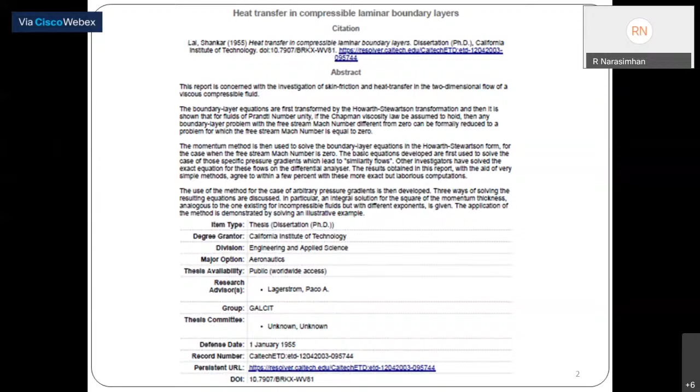All right, so with that little reminiscence about connections with Caltech, let me turn to the topic of my presentation, which is going to be on mechanics and mechanisms of fracture of magnesium alloys, a topic in which I've been working for the last 10 years or so. Let me begin by first acknowledging my collaborators: my former PhD student, Subramanya Prasad Narla, and my current PhD student, Vaishak,

my colleague in materials engineering, Professor Satyam Suwas, with whom I've been collaborating quite extensively on this topic, my former master's student, Kaushik, who later went and did his PhD at Brown University, and now is employed at GE Global Research in New York, and Dr. Raj Mishra from General Motors R&D Warren Labs, Michigan, who actually introduced me to this topic of magnesium deformation and fracture.

Now, magnesium alloys have been attracting a lot of attention in recent years for a variety of reasons. The most important being that they have low density and high specific strength, and they also have good damping characteristics and machinability. In view of this, they are being considered as economic replacements for aluminum die castings, cast iron, and steel components in automobiles. If you take a look at the photograph on the right side, that is an inner door frame made from magnesium alloy.

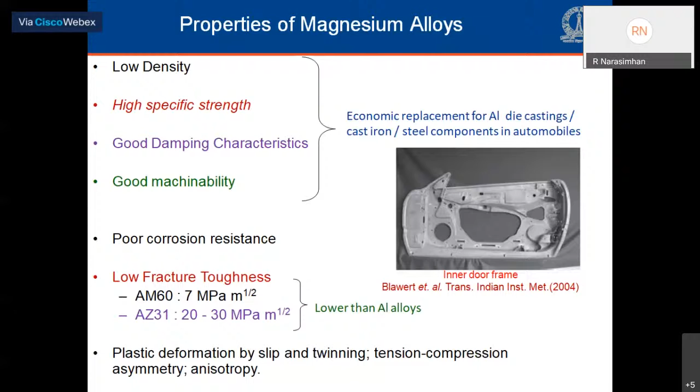The top panel, comprising basal slip, prismatic slip, and pyramidal slip A, cannot accommodate deformation along the C-axis of the hexagonal lattice. It requires activation of one of the systems from the bottom panel, which involves pyramidal A plus C slip, tensile twinning or 10-1 bar 2 type, and contraction twin or 10-1 bar 1 type.

The tensile twins are called tensile twins because they cause extension along the C-axis, whereas the contraction twins cause contraction along the C-axis. The tensile twins can widen very rapidly. They can engulf entire grains, as we are going to see in some of the slides subsequently.

Contraction twins, on the other hand, remain typically narrow. Both of these involve very large rotation of the crystallographic lattice when they take place.

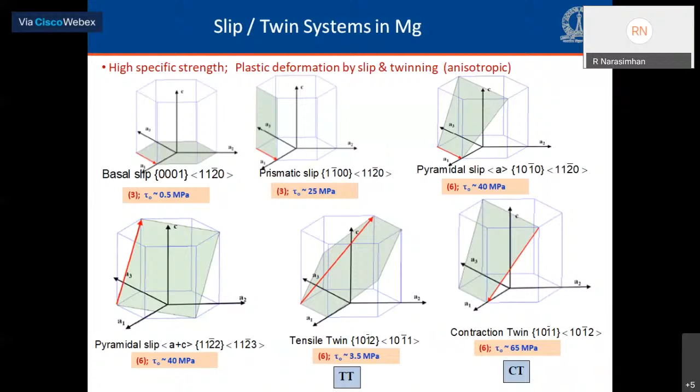If you examine the critical resolved shear stress values listed here, you'll note that basal slip and tensile twins have very low critical resolved shear stress. They are soft deformation modes, whereas pyramidal C plus A and contraction twins are hard deformation modes. Let me show one very important result from the literature which would motivate our work.

This is a study on the effect of stress triaxiality on ductility and the failure mechanism in a rolled AZ31 magnesium alloy, from the work of Kondori and Benzerga. They did tension tests on smooth and notched cylindrical bars cut from a hot rolled AZ31 magnesium alloy. What you see in this slide is the fracture surface corresponding to a sharply notched Rn2 specimen, which has a certain triaxiality.

The triaxiality T is defined as the ratio of the mean stress to the equivalent stress, sigma m by sigma e. The Rn2 specimen has a triaxiality of around 1.5.

If you examine the fracture surface, you can see there are grooves or flutes, elongated groove-like features, associated with a cleavage type mechanism, basically twin-induced microcracks.

On the other hand, if you look at the right side micrograph, which pertains to a shallow notched Rn10 specimen with a lower triaxiality of around 0.8, we see ductile void growth and coalescence. So there is a transition in the fracture mechanism as the triaxiality decreases.

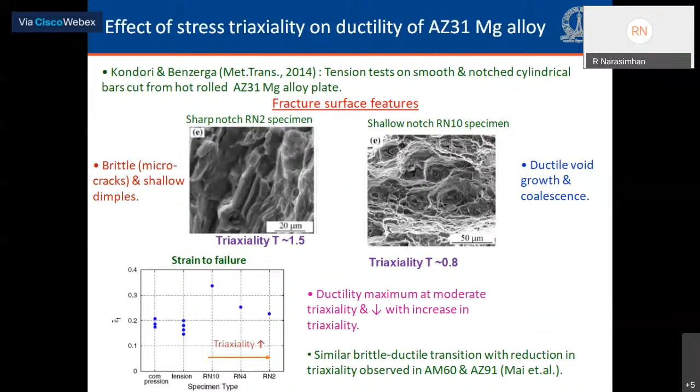Similar brittle to ductile transitions with reduction in triaxiality have also been observed in other magnesium alloys like AM60 and AZ91. Now, with that little introduction, let me turn to the objectives of our work.

Since tensile twinning, although contraction twins are also important, have been shown in the literature to play a very pivotal role on the deformation and failure in magnesium, we wanted to understand this more closely. So we wanted to begin by doing fracture experiments using magnesium single crystal specimens and understand how tensile twinning develops and its effect on fracture resistance.

The reason we chose magnesium single crystals is because it's easy to vary the lattice orientation and understand the effect of individual twin and slip systems more easily when working with single crystal specimens.

The next objective was to look at a polycrystalline AZ31 magnesium alloy, a very commonly used wrought alloy. Here, the effect of notch root radius, namely the stress triaxiality, and mode mixity—that is, the combination of the tensile mode (mode 1) of fracture and the in-plane shearing mode (mode 2)—on twinning development and fracture behavior was to be investigated.

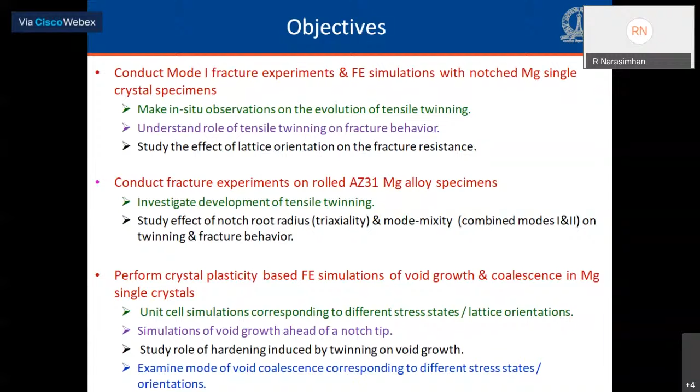The last objective, which I'll describe today, is some finite element simulations of void growth and coalescence in magnesium single crystals. Here we carried out simulations using unit cell models as well as void growth and coalescence ahead of the crack tip in the fracture process zone.

Let me first show some results from our fracture experiments using magnesium single crystal specimens. These were conducted using three-point bend specimens, tested inside a scanning electron microscope with provision for electron backscattered diffraction to make in situ observations.

As I said, one of the ideas was to look at the lattice orientation. So we considered three lattice orientations, which I'm calling A and B, shown on the right side schematics. The C-axis, which is the 0001 axis of the hexagonal lattice, is along the normal to the flat surface of the notch, while the direction ahead of the tip and along the crack front are switched around between these two geometries.

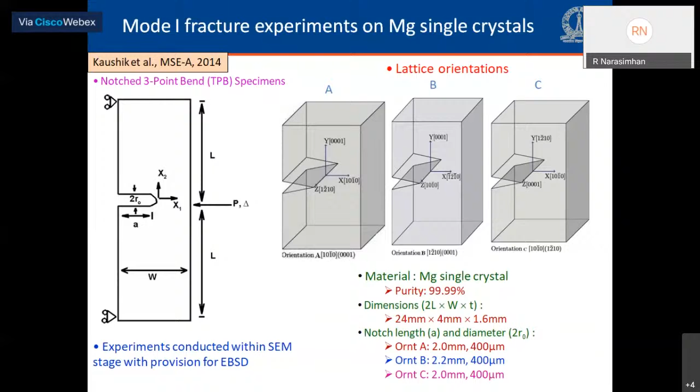If you look at orientation C, the C-axis is along the thickness direction. The dimensions of the specimen are listed at the bottom: the width is about 4 mm, the span about 24 mm, thickness around 1.6 mm. The notches in these specimens were cut using electric discharge machining, EDM, to a diameter of about 400 microns. The crack length to width ratio, A by W, is about 0.5.

These are electron backscatter diffraction maps, EBSD maps, corresponding to orientation A, shown at the bottom left side. Remember, in orientation A, the C-axis is along the normal to the flat surface of the notch, as you can see in the schematic on the left side top.

On the bottom left side, we see the inverse pole figure map of the as-polished specimen, and we can see a strain-free surface in this case.

The right side sequence of images are image quality maps obtained from the EBSD data corresponding to different stages of deformation, load point displacements delta.

Here the extension twins, TTs, are colored red, the 10-1bar2 twins. Early during deformation, twins W and B nucleate at the notch root, and with increasing deformation they both widen and extend. As deformation proceeds, multiple intersecting twins nucleate, and some of these obstruct the extension of the initial twins. So the width of the initial twins increases and then saturates at around 120 to 140 microns.

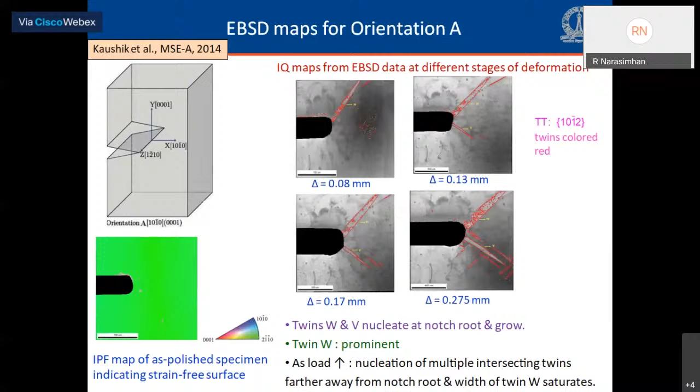In the case of orientation B, the development of twinning was very similar to what I showed in the last slide, with the C-axis along the normal to the flat surface of the notch. But it turned out that in all the specimens tested for orientation B, there were some polishing twins present, and these impeded subsequent twin development and led to premature failure. I'll mention that a little later in my presentation.

Let me turn to the other orientation, orientation C, where the C-axis, as shown in the schematic, the 0001 axis, is along the direction of the notch front, that is along the thickness direction.

Again, taking a look at the IPF map of the as-polished specimen at the bottom left side, you can see a strain-free surface in this case. Examining the sequence of IPF images on the right side corresponding to different load point displacements, we can see a different pattern of twin development taking place.

Unlike in the case of orientation A and B, where twinning started from the notch root and emanated outward, here it commences at the far edge of the specimen, where there is a compressive global bending stress field, which in this orientation is favorable for extension twinning. That set of twins propagates towards the notch root, as you can see by following the sequence of images.

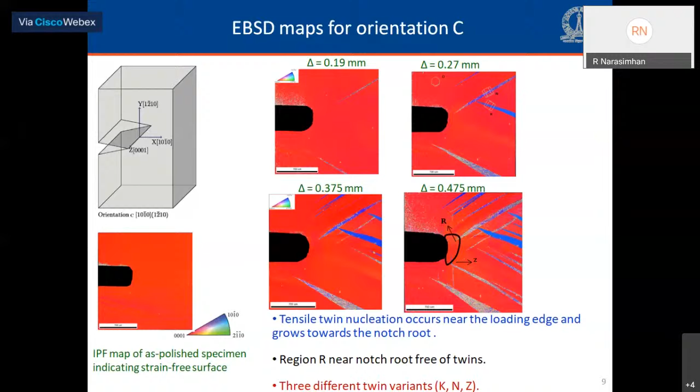At very large load point displacement, however, there is a region identified as R in my bottom right side image which is still free of twins. We also see 3 twin variants in this case, as opposed to the other case where we saw 2 twin variants.

One of the things we wanted to investigate, which has very rarely been looked at in the literature, is whether some of these twins persist through the thickness - do they have a 3-dimensional character? So we unloaded some of our specimens, then chemically etched and polished them down to the quarter plane and the mid plane, and subjected the specimens to EBSD analysis.

I've shown here on the top sequence of images, image quality maps from an unloaded specimen corresponding to orientation A - the free surface, the quarter plane, and the mid plane. If you examine these images, the pattern of twin development is very similar; there's not much thickness dependence. In fact, some of the twins, like the W and V twin I showed earlier, seem to persist all the way through the thickness.

We quantified the average twin volume fraction by marking out a rectangular region PQRS, about 900 microns in size, and used ImageJ software to quantify the twin areas, then calculated the average twin area fraction. In the table at the bottom, you can see that at this stage there is not much dependence on thickness for this orientation, around 25% everywhere.

On the other hand, if you look at orientation C, shown at the bottom, the IPF maps on the free surface and the mid plane show a more pronounced thickness dependence, with the mid plane showing more profuse twinning compared to the free surface. The average twin area fraction is about 89% for the mid plane and around 78% for the free surface in this unloaded specimen. There's a bit more thickness dependence in this particular case.

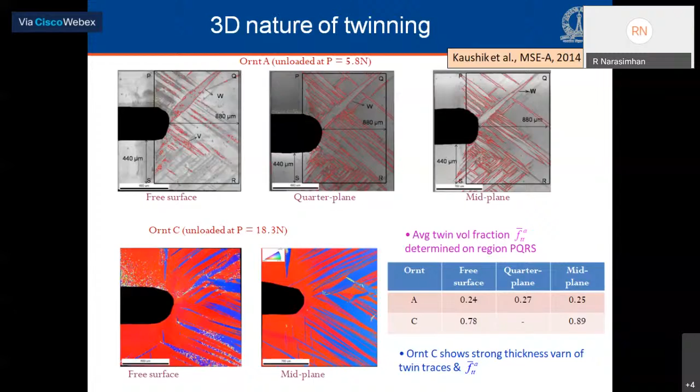Let us look at optical metallographs in order to understand the type of slip traces and twin traces, as well as the crack path. This slide pertains to orientation B, where again the C-axis is normal to the flat surface of the notch.

If you look at the left side image, the optical micrograph on the left side, we can make out two slip traces, S1 and S2, which I have marked. The S1 slip trace, which is parallel to the notch flank, pertains to basal slip. The S2 slip trace, which you can see near the extended crack, which are horizontal, those pertain to prismatic slip.

Also, you can see traces of two twin variants, which are intersecting ahead of the crack tip. A very interesting feature is if you follow some of the basal slip traces, take a look at the optical image on the right side top. If you follow the line KJIH, that line deflects by almost 90 degrees inside a twin, and then again deflects back by 90 degrees as it exits the twin. This suggests this is due to the lattice rotation inside the twin, and suggests strong secondary slip activity taking place inside the twins.

Now, in all our experiments, the crack initiates before the peak load, and it grows stably along the twin boundary. And when it reaches the intersection between two twins, it gets deflected. You can see that in the right side image very clearly, top image, MN and NO are the two segments. The deflection has taken place at point N at the intersection between two twins.

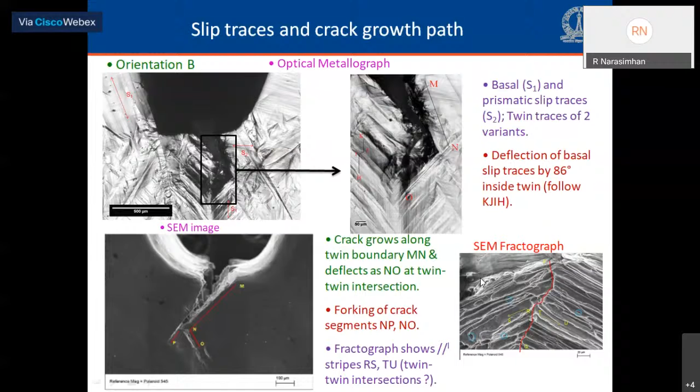We saw the twin-twin intersection in the optical metallographs as well as in the EBSD images. We quantified the average twin area fraction as a function of load, as I described earlier, by marking out a rectangular region about 900 microns, a very large region, and then evaluated the average twin area fraction using the ImageJ software and plotted it against load corresponding to the three orientations.

That is the picture, the figure which you see on the left side. And the right side is the energy release rate, J, plotted as a function of load. Now, if you examine these two figures, you see a qualitative similarity between the two. In particular, if you look at the twin area fraction evolution for orientation A and B, they are similar, except that in the case of orientation B, you will see that FTT, the average twin area fraction, starts from a finite value.

This is because there are some polishing twins which are present in the specimen, as I mentioned. Also, it tends to saturate early, and that is owing to the impediment caused by the polishing twins to subsequent twin development. This also led to premature failure, as you can see on the right side. The circular symbols indicate the stage at which the specimen failed.

The qualitative similarity between the twin area fraction near the notch tip and the energy release rate histories suggests that tensile twinning is an important dissipation mechanism and can therefore enhance the toughness.

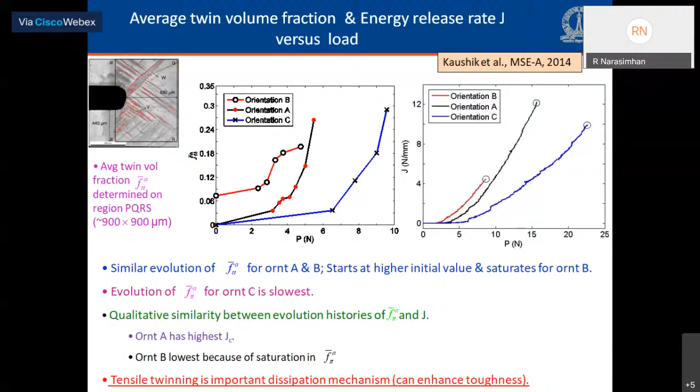In order to understand the experimental results more clearly, we also did complementary numerical simulations, finite element simulations, using crystal plasticity model, single crystal plasticity. So the kinematics involved is illustrated in this slide.

The classical crystal plasticity formulation is due to Asaro and Rice, which is shown on the left side, and this was modified for treating twinning as a quasi-slip process by Kalidindi, Staroselsky and Anand, shown on the right side here. Both these formulations involve a multiplicative decomposition of the deformation gradient into an elastic part Fe and a plastic part Fp.

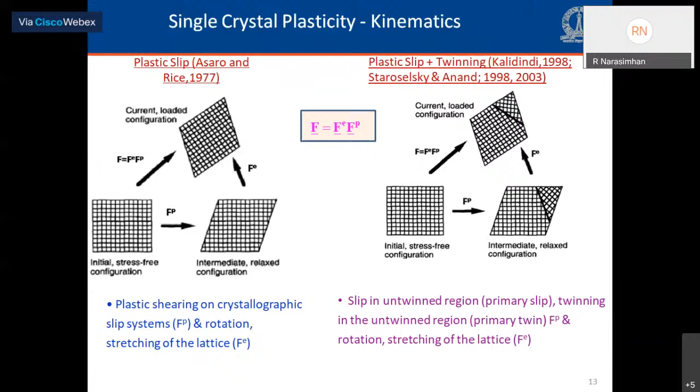If you take a look at the left side schematic, in the case of the Asaro-Rice formulation, Fp takes into account plastic shearing on crystallographic slip systems, whereas Fe accounts for the rotation and the stretching of the lattice. In the Kalidindi-Staroselsky-Anand formulation on the right side, Fp accounts for slip in the untwinned region and twinning in the untwinned region, which is called primary slip and primary twinning, whereas the stretching and the rotation of the lattice are vested in Fe.

The flow rule is written, as you can see in this slide, for the plastic part of the spatial velocity gradient, LP, given by the equation at the top of the slide, and it involves contributions from slip in the untwinned region, the first term on the right-hand side of this equation, and twinning in the untwinned region, which is the second term in the RHS.

In these equations, capital S represents the Schmid tensor, gamma is the plastic slip, gamma TW is the twinning shear, which is around 0.13 for extension twins and around 0.14 for contraction twins in the case of magnesium, and F alpha is the twin volume fraction.

At a certain continuum material point, the contribution to the average Cauchy stress arises both from stress in the untwinned region and the stress in the twin region, as you can see from the equation given in the middle of the slide.

In our calculations, we made use of the hardening and evolution laws for plastic slip and twinning. These are phenomenological laws given by Zhang and Joshi. One of the hallmarks of their work was that they actually benchmarked these parameters against channel die compression experiments of Hosford and Kelly, corresponding to 6 or 7 orientations for magnesium single crystals, and tuned their material parameters. So we used all those values in our models, in our analysis as well.

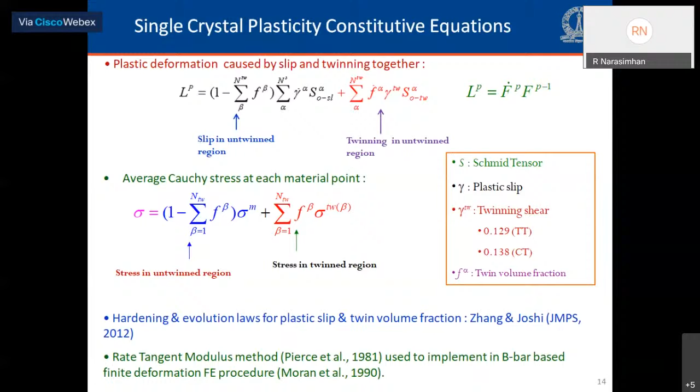We implemented this model in our own in-house finite element code using the rate tangent modulus formulation of Pierce, Asaro, and Needleman. We implemented this within the framework of a finite deformation, finite element procedure, B-bar based, to treat nearly incompressible deformation in the fully plastic range.

This is a finite element model of the single crystal specimen. We did 3D analysis, and because in all these specimens, all the orientations, there is both crystallographic symmetry as well as mode 1 symmetry, we consider half the specimen through the thickness and half along the length.

In-plane views of the mesh, as well as the detailed view near the notch root as shown here, we model half the specimen through about 7 element layers. These get increasingly thin as we approach the free surface in order to capture the steep stress gradients as you approach the free surface.

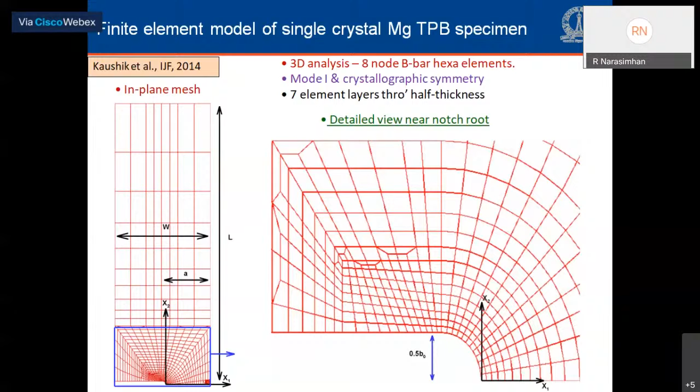These are load displacement plots from the numerical simulations which are compared against the experiments for the 3 orientations. We see a reasonable agreement between the two, and both sets of analysis, experiments as well as simulations, show a bilinear response with very high hardening.

This hardening is associated with twinning, essentially tensile twinning, with various mechanisms invoked by twinning like twin-twin intersections and twin-slip intersections, as well as texture hardening. All these result in very large hardening.

One of the things you can see in these experimental curves is some serrations in the load displacement curves. These are associated with nucleation of discrete twins. Whenever a discrete twin nucleates, it leads to a drop in the load, because of an increase in tensile strain. That's not captured in the simulation because the simulation assumes twinning as a quasi-slip process.

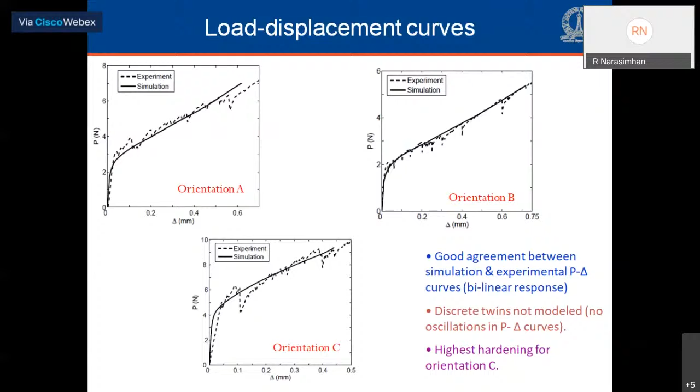These are contours of twin volume fraction corresponding to orientation A and orientation C. What I have shown here is the contours on the free surface of the specimen at the midplane, as well as through the thickness on the right side, taken on a plane ahead of the notch tip. Those are the three images which you see in each row.

The top row is for orientation A and bottom row is for orientation C. We note again that in A, the C-axis is along the normal to the flat surface of the notch, while in C, the C-axis is along the thickness direction.

If you look at the top panel, you can see that the twin volume fraction is developed in a roughly rectangular region emanating out from the notch root, and there's not that much thickness dependence. If you examine the image on the top right side and the twin volume fraction contours, there's not much variation through the thickness as you go from the midplane to the free surface.

On the other hand, if you look at the bottom side, you see a different pattern of twin volume fraction development. It starts at the far edge of the specimen and then approaches the notch root. There's a region near the notch root which is free of twins, as we saw in the experimental EBSD images. Also, there is more distinct thickness dependence, which we can make out clearly on the image on the right side. So the simulations do capture some of the essential features of what we saw in the experiments.

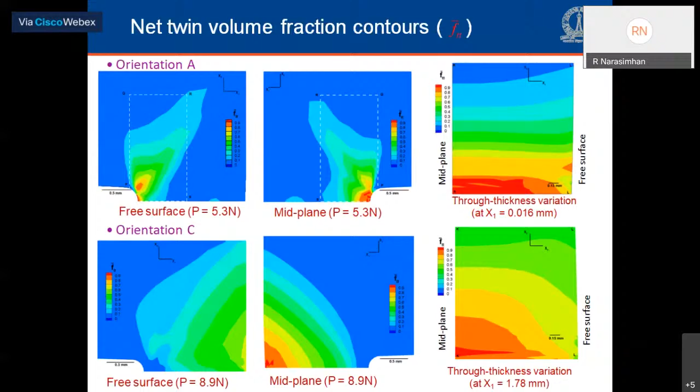We also quantified the average twin volume fraction by considering a rectangular domain in the finite element model, marked out as EFGHI, and calculated the average twin area fraction, plotting it against load and comparing with experimental data. We see reasonably good agreement for orientation A and C, whereas in orientation B there are some differences, attributed to the fact that in experiments there were some polishing twins which impeded subsequent twin development, not captured in the simulations.

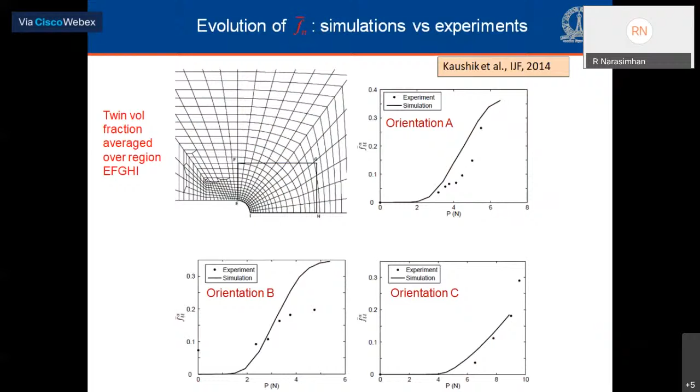One thing we wanted to understand, as pointed out earlier, is the deflection of cracks at the intersection between two twins—what is the origin for that? To investigate this, we took two discrete twins from the exact variants seen in our experiments corresponding to orientation A, and put them in our FEM model. So that's what you see here.

Two discrete twins, 1 and 2, intersecting along a line AB. Looking at the left side mesh, this is the initial configuration where from the notch root, the crack extends along OA with a tip located at point A. In case 1 simulation, we assume the crack extends along the twin boundary of twin 1 without any deflection, with a crack tip at point B. In case 2 simulations, we take the crack to have deflected at point A and extended along AC with the tip located at point C.

The analyses conducted here are plane strain finite element analysis using the same crystal plasticity theory which I described. The energy release rate is computed as the rate of decrease of the strain energy with respect to crack area.

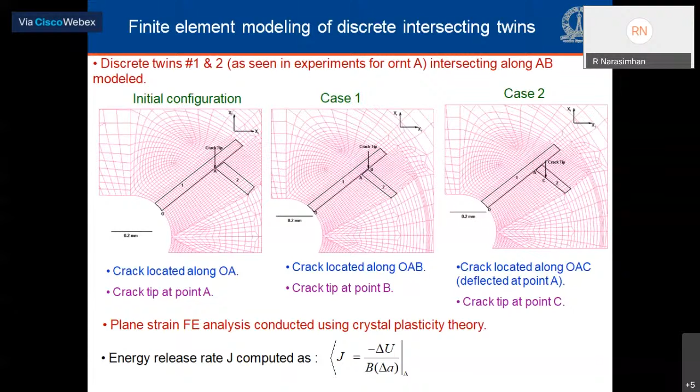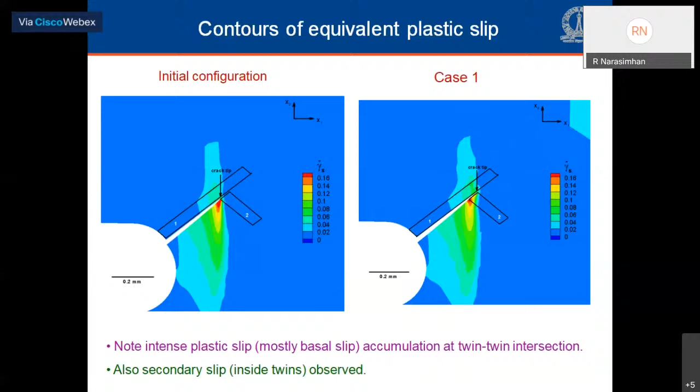Before showing the energy release rate variations, let's look at contours of equivalent plastic slip for the initial configuration on the left, and the case 1 simulation on the right. The crack tip locations are indicated in both. Interestingly, in the right side contour plot, there is more intense plastic slip concentration at the intersection between the two twins rather than at the current crack tip, and the crack has actually opened up along the twin boundary. Furthermore, we see plastic slip development inside the twins—secondary slip activity—which we saw in our optical metallography. That is again evident from these numerical simulation results.

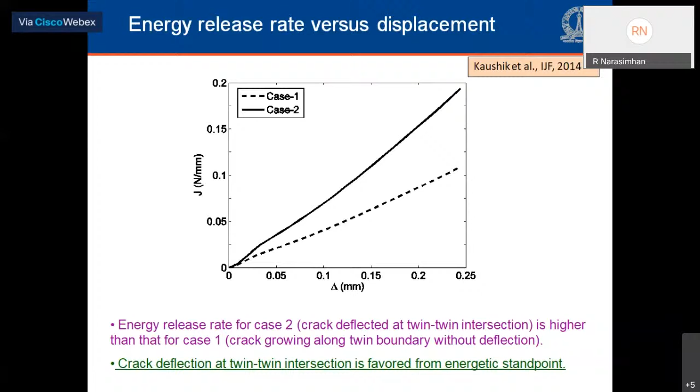Let me summarize the key takeaways from this part of our work. We noticed profuse tensile twinning occurring ahead of the notch tip in all orientations studied, but the pattern of twin development depends on the lattice orientation, as seen in the difference between orientation A and C. In all experiments, the crack grows stably along the twin boundary, getting deflected at twin-twin intersections, which our finite element analysis showed to be favorable from the standpoint of energy release rate. Perhaps the most important takeaway is that tensile twinning is an important dissipation mechanism. Its evolution near the notch root correlates well with the energy release rate history, establishing this as a mechanism that can enhance toughness. We will see more of this in the polycrystal experimental work I'm going to show next.

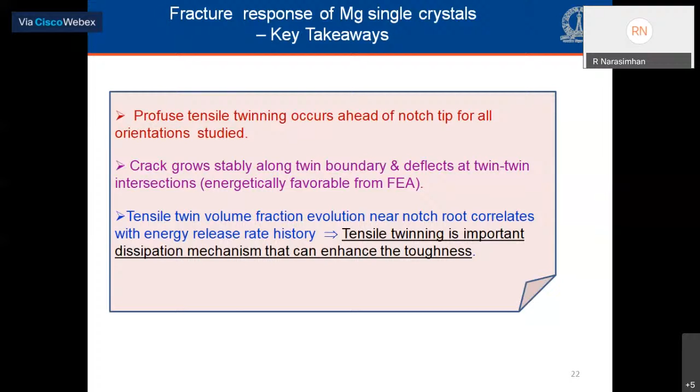Now let me turn to some experiments using rolled AZ31 magnesium alloy. We conducted experiments using both compact tension and 4-point bend specimens, thickness around 10 mm. One idea here was to look at the effect of stress triaxiality, which is a very important factor in fracture of magnesium. So we varied the notch root radius and considered different EDM cut notches, as well as fatigue pre-crack specimens (FPC) in our experiments.

What you see on the left side is the inverse pole figure map of the as-polished specimen, and the right side are pole figures, 0001 and 10 1 bar 0 pole figures. The IPF map shows a nearly basal texture with most of the grains having the C-axis along the normal to the flat surface of the notch.

But there is some deviation from an ideal basal texture. We can make that out clearly if you look at the 0001 pole figure on the right side. The intensity, the red region, is not exactly at the center, which is the ND, but a little offset towards RD. This deviation is less in the midplane of the specimen as compared to the free surface, and we believe this is attributed to the rolling operation.

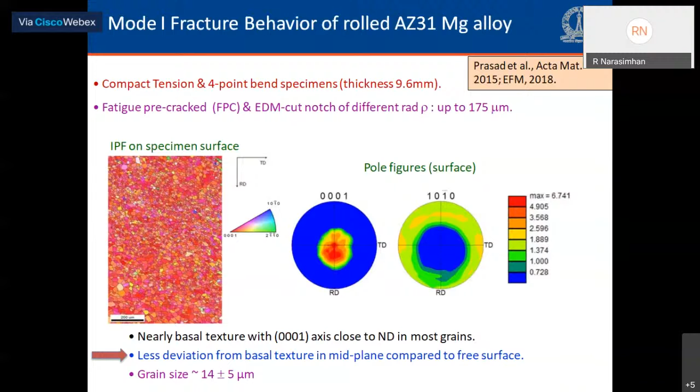The average grain size for this alloy is around 14 microns. The student who worked on it, Prasad, who is I think there in the audience, did a very thorough job, and he stitched together several optical metallographs and came up with this schematic on the right side, which depicts the twin development over the entire specimen, and it is ubiquitous, as you can see there.

There's twinning all over the specimen, especially in the ligament at the far edge of the ligament at location B, near the notch tip at location A, above and below the notch tips taking place.

Now, the left side set of images are inverse pole figure maps taken at two locations, at point A, which is very close to the notch root, and point B, which is at the far edge of the ligament. At point A, Prasad took the scans both in the midplane as well as the free surface. They are shown on the top image and the one in the middle. The bottom one is taken at the free surface at location B.

Now, in all these images, all the IPF maps, we can see presence of thick extension twins, 10 1 bar 2 type twins. Comparing the top IPF image with the middle one, we see more profuse twinning in the free surface compared to the midplane in this case, and that's because of the texture difference which I noted in the last slide.

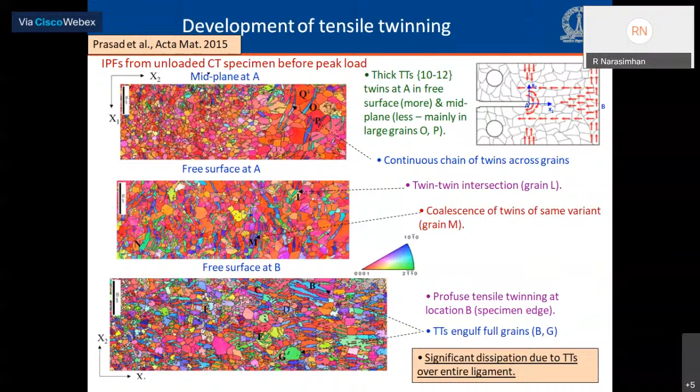The bottom figure shows some of the grains having completely been engulfed by tensile twins, for example grain B and grain G. So this establishes the significant dissipation happening because of extension twins over the entire ligament.

Now, these are optical metallographs corresponding to different notch root radii taken from the 4-point bend specimens. In all the images, we can see twins are present in the grains surrounding the crack tip. We actually quantified this by considering several 100-micron size domains.

Prasad did a very systematic job again and calculated the average twin area fraction by doing very painstaking metallographic work, and found that the average twin area fraction increases from about 4 to 14% as the notch root radius decreases from 175 microns to the fatigue pre-crack specimen, which is shown on the bottom right side. That is the FPC or the fatigue pre-crack specimen.

Now, taking a look at this FPC specimen, if you closely observe ahead of the crack tip, there is a slit-like void, which we have labeled as W, and this is presumably associated with the twin-induced crack that has formed. On the other hand, if you examine all the other optical images pertaining to the pre-notch specimens, you would notice that there are some oblate voids.

For example, if you look at the top left image corresponding to the 175 micron notch root radius, you'll see two voids P and Q, which have actually coalesced with each other, and they're about to coalesce with the tip as well.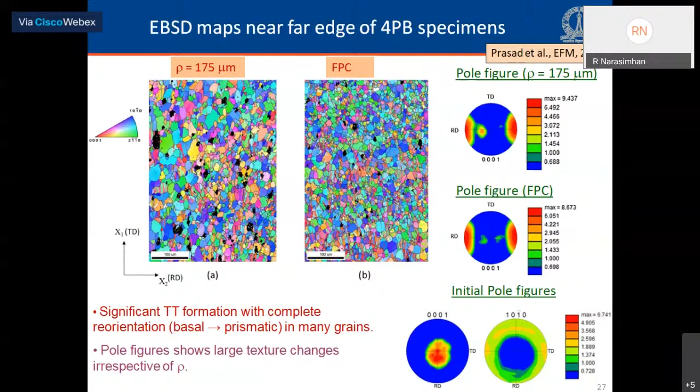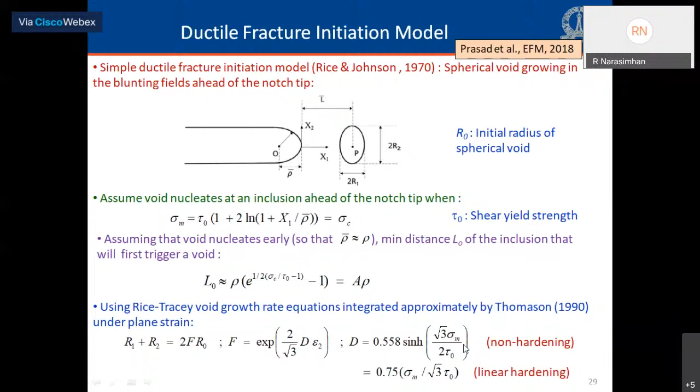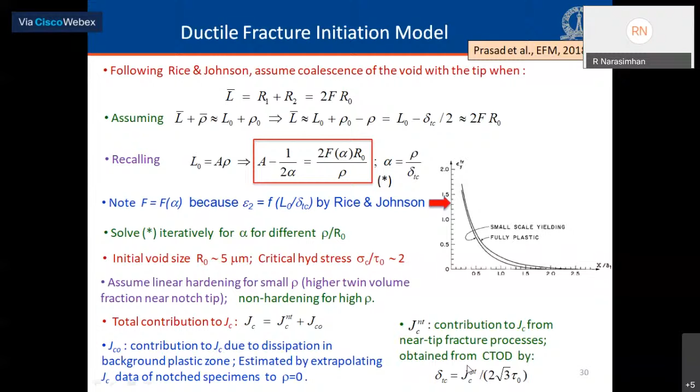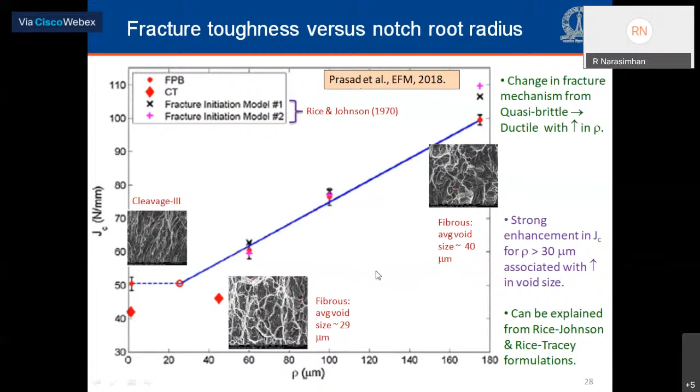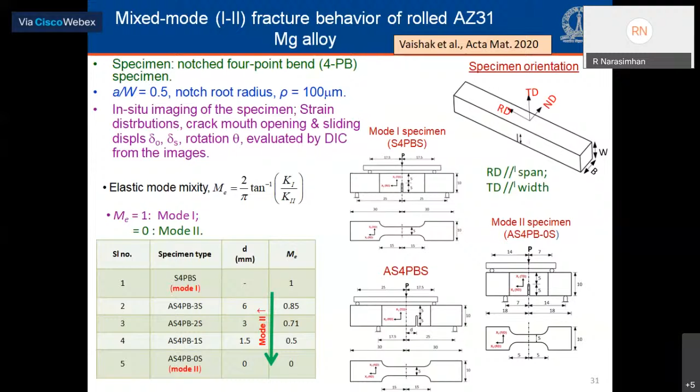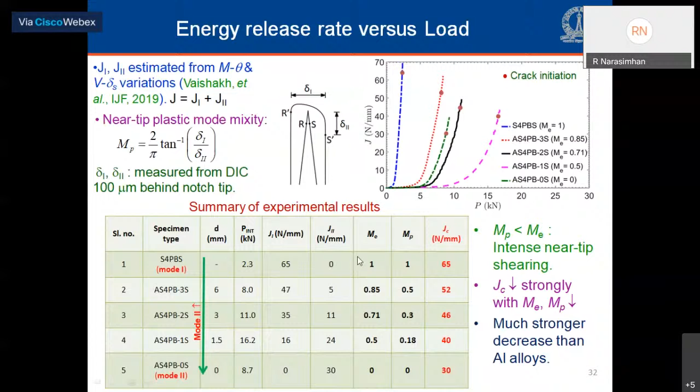We also introduce here a definition of plastic mixity, MP, based on measured values of near tip opening and sliding displacements of the crack tip, indicated by the equation on the left side. The most important observation from the table is that as we decrease the mode mixity and approach mode 2, the notch fracture toughness diminishes quite extensively, by more than a factor of 2. Also, the plastic mixity, or near tip mixity, is lower than the elastic mixity, due to intense shearing taking place in this specimen.

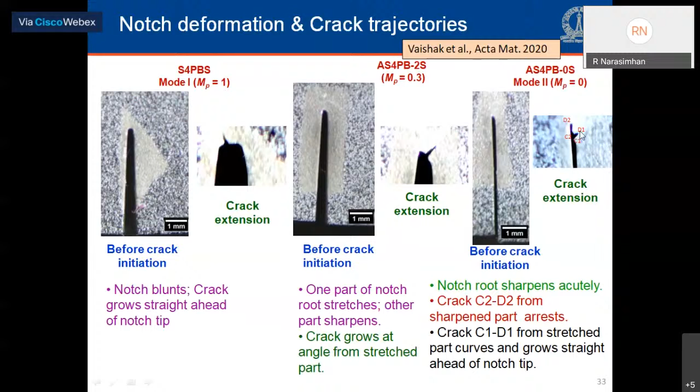In the mode 2 case, there is acute sharpening of the notch tip, and there are two branches of cracks which initiate. The portion C2D2 at the sharpened part grows a little bit and arrests, whereas the C1D1 branch initially grows at an angle, then curves around and goes straight ahead of the crack tip.

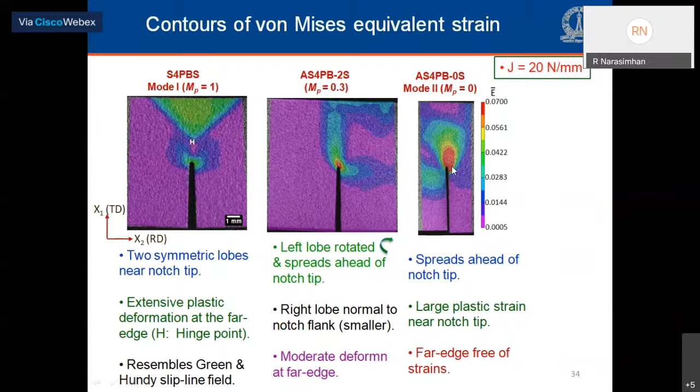In the middle image for the mixed mode specimen, the left lobe has rotated clockwise and extends straight ahead of the tip, whereas the right lobe remains normal to the flat surface of the notch. In the mode 2 case, there's much less twinning at the far edge of the specimen compared to the mode 1 case, and the strain is mostly focused around the notch tip.

Taking a look at the fractographs, we again notice transitions in the fracture mechanism. The left side fractograph is for the mode 1 case, essentially dimple fracture with a lot of inclusions sitting inside the dimples.

In the mixed mode case in the middle, we see a hybrid mechanism involving twin-induced microcracks, which are elongated grooves or slits, as well as some small voids. In the mode 2 case, we see a heavily sheared fracture surface, possibly because of rubbing of crack faces, closure of the crack, and further rubbing of the crack faces.

We quantified the average void size as a function of mode mixity for different specimens, and we noted, comparing the left and middle images, that the average void size actually decreases as the mode mixity drops from mode 1 to the mixed mode case.

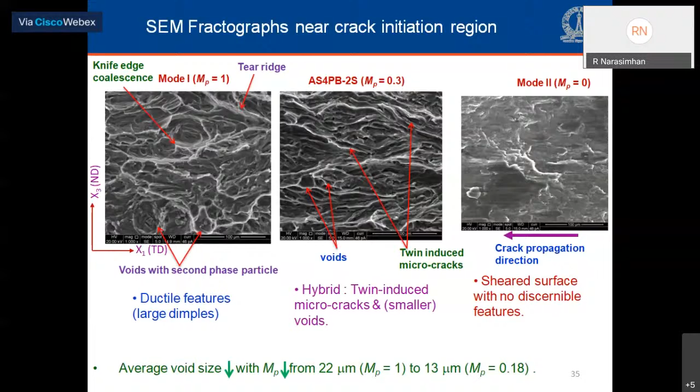These are EBSD maps taken at the far edge of the specimen in that brown rectangular region, which you see on the schematic on the left side.

Again, for mode 1, mixed mode, and mode 2 case, I have also affixed the strain contours, von Mises strain contours on top. If you compare the three different cases, in mode 1 on the left side, you see almost all grains are completely reoriented, and the texture shows massive changes.

The bottom pole figure shows basal to prismatic change in the texture. In the mixed mode case, we took scans at two locations. Looking at the top right, middle image in the DIC map, we marked location A, inside the strain band, and B, just outside the strain band.

At location A, the EBSD map is very similar to the mode 1 case, with lots of grains completely reoriented and massive texture change. If you step a little outside that strain contour band, the EBSD scan on the right side shows much less twinning and much less texture change. Going to the mode 2 case on the extreme right, there is much less strain at the far field and far fewer twins and less change in texture compared to mode 1 or mixed mode case.

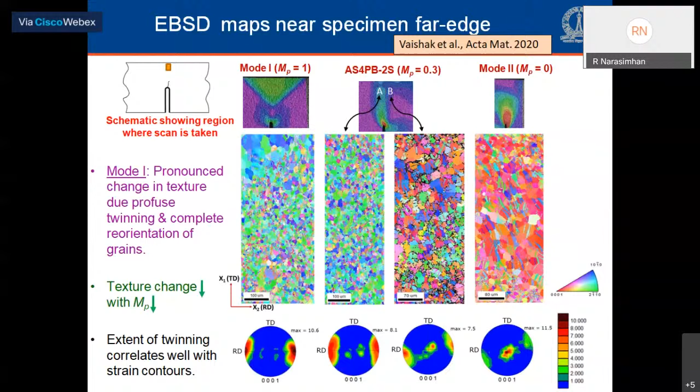So with increasing mode 2 component, the texture changes at the far edge of the specimen associated with twinning, as well as the strain concentration at the far edge, diminish as you go towards the mode 2 case. Now let's try to understand the dependence of notched fracture toughness JC on mode mixity by piecing together all this information.

I plotted JC against mode mixity, going from the mode 1 case to mode 2, and added the SEM fractographs as well as the von Mises DIC strain contours so we can take a wholesome view of what's going on. In the mode 1 case, at the top right extreme, remember that failure happens due to ductile void growth and coalescence.

There is a lot of dissipation caused by twinning, as you can make out from the strain contours, leading to high toughness. As you transition towards the mode 2, mixed mode case, there is a transition to a hybrid mechanism with more brittle features, twin-induced brittle features seen on the fracture surface, as well as less dissipation caused by twinning in the background plastic zone.

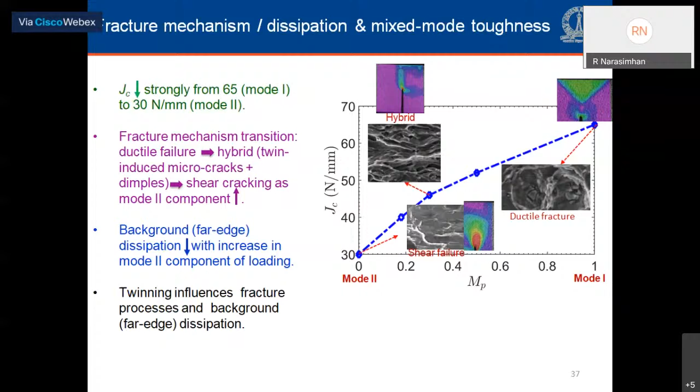As you go further towards the mode 2 case, there is far less twinning-induced dissipation and a shear mode of failure. So the combination of these two factors, the transitioning fracture mechanism and the reduced dissipation caused by twinning, is possibly the reason for the large change in toughness as you go from mode 1 to mode 2. I've summarized the key takeaways from this part of the work.

In the interest of time, I'll move on and show some results from our finite element modeling, trying to understand how void growth and coalescence takes place in magnesium. This is again restricted to single crystal simulations, because when you model single crystals, you can vary the lattice orientation very easily.

That gives you a perspective from the context of individual grains where the lattice would change, and we could understand it better. So from the context of texture engineering, it would be better to look at single crystals. That's the reason why we work with single crystal simulations.

These are plane strain simulations with a unit cell, a square unit cell with a circular cylindrical void placed at the center, subjected to different macroscopic stress ratios, sigma 1 by sigma 2. In these simulations, we use the crystal plasticity model described earlier, along with those hardening laws mentioned. Two different lattice orientations were modeled.

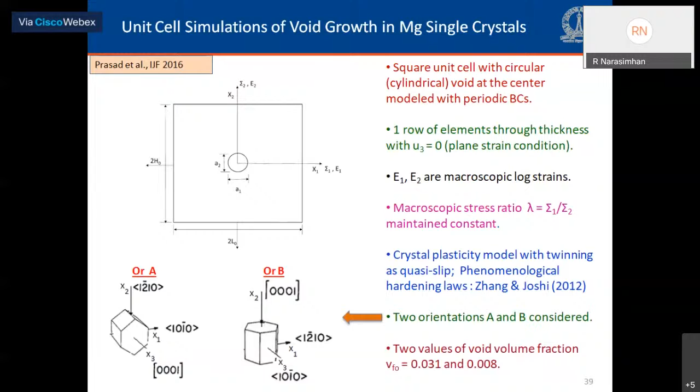In orientation A, the C-axis is along the out-of-plane direction, that is the thickness direction. In orientation B, it's along the maximum principal stress direction, X2 direction. These are contours of plastic slip corresponding to orientation A for a large lambda of around 0.8 stress ratio, shown at the top, and the bottom figure is for lambda 0.2, a low stress ratio.

In this particular orientation, prismatic slip is predominantly active. At the top contours, at low strain, prismatic slip starts developing around the void surface, and as the macroscopic strain increases, the prismatic slip engulfs the entire transverse ligament, leading to its necking. For the lower stress ratio shown in the bottom images, we see that initially the prismatic slip develops as an inclined band, cutting diagonally across the unit cell.

As the strain increases, it focuses or localizes on the transverse ligament, leading to its necking. So we use a criterion based on transition to uniaxial straining along the X2 direction to determine the stage at which void coalescence takes place.

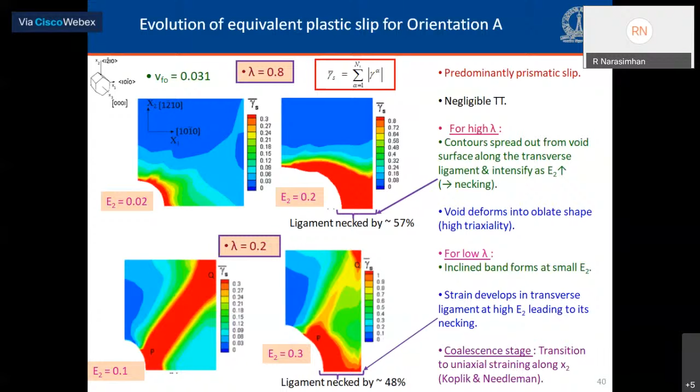Now looking at orientation B, where the C-axis is along the maximum principal stress direction, different slip and twin activities are triggered before the lattice reorients due to twinning. Basal slip and extension twinning are active, as you can see from the top two contour plots.

Basal slip emanates from the void surface, while tensile twin volume fraction contours start from the lower corner of the cell. As the strain increases, it engulfs a major portion of the cell, as you can see in the bottom right side image.

Once that happens, the lattice reorients and triggers additional slip activity, particularly the hard slip system like pyramidal C plus A. You can see that evident in the left side bottom image, where it has formed slip contours, plastic strain contours on the transverse ligament, and ultimately necking of the transverse ligament takes place.

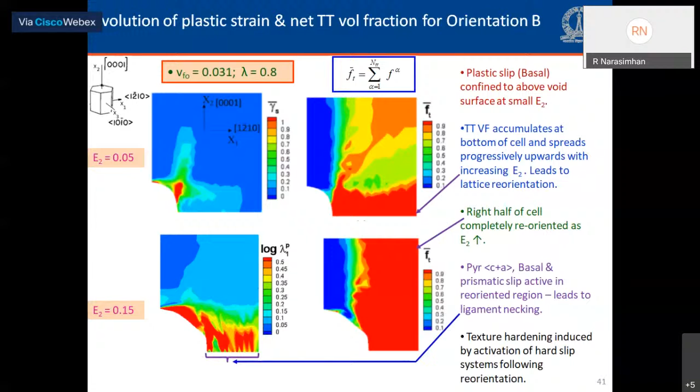One of the features of this is that it leads to a lot of texture hardening, as we will see from load displacement plots. These are contours of twin volume fraction and plastic slip corresponding to low stress ratio, again for orientation B.

At small strain, if you look at the contours at the top, basal slip and tensile twin are initially active. As the strain increases, extension twins completely engulf a major portion of the cell.

One of the things that happens is that prismatic slip and pyramidal C plus A slip get triggered, leading to shear band induced coalescence as opposed to transverse ligament necking. On the left side image, you can see shear bands crisscrossing the unit cell, leading to asymmetric deformation, as opposed to other cases where the deformation continues to remain symmetric.

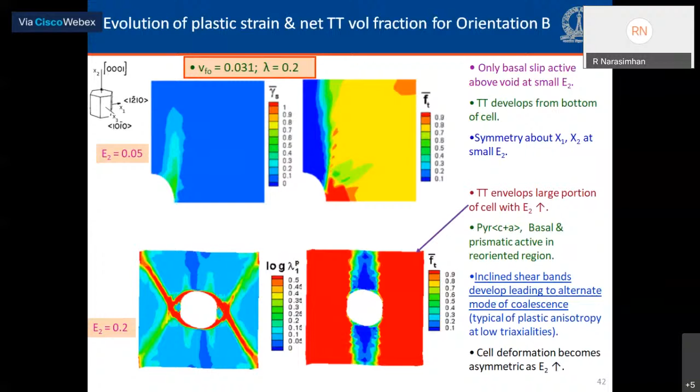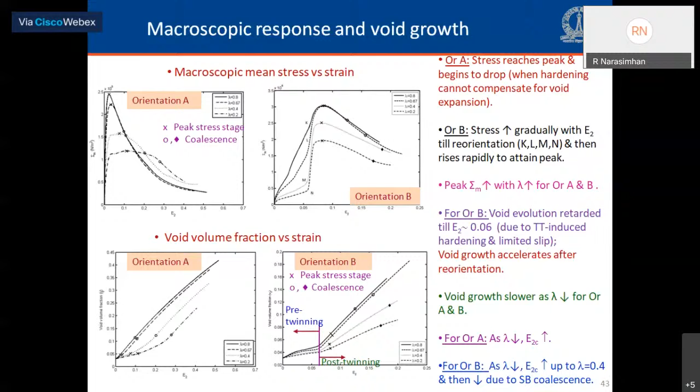One of the features of our modeling is that we incorporate a set of voided cells, an array of square voided cells in the fracture process zone ahead of the tip, so that we can look at how void evolution takes place in the FPZ in the simulation. These are square cells with each cell having a circular void at its center.

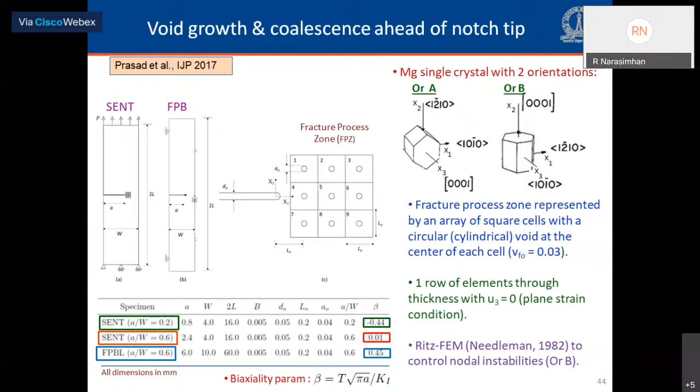As we saw from the unit cell simulation, prismatic slip is basically active here. As J increases, it is restricted to the row of voids ahead of the tip. These voids progressively deform into oblate shapes, strain localizes in the ligament, and they keep necking down, so there's a void-by-void growth mechanism active for this orientation.

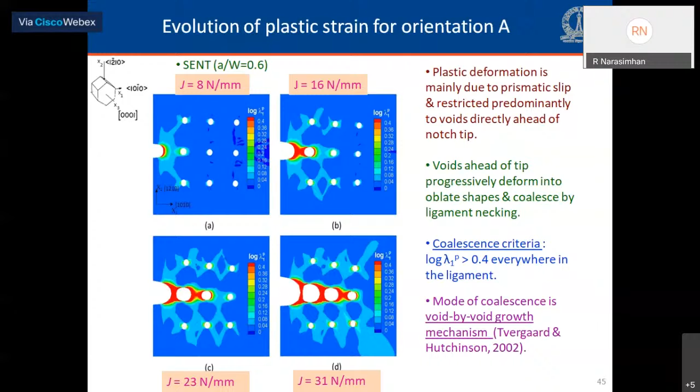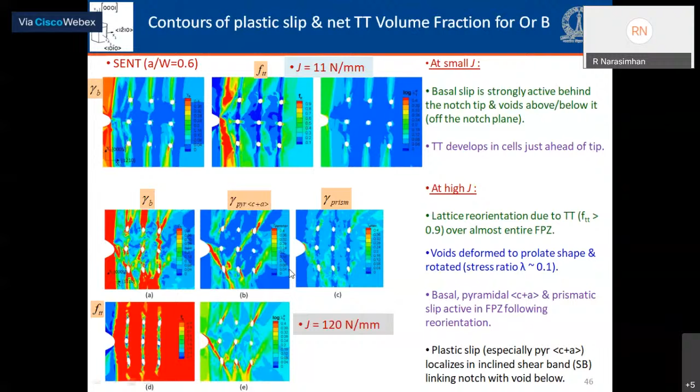This triggers, as noted from the unit cell, additional slip activity like pyramidal C plus A, visible in the right side middle image as shear bands crisscrossing the fracture process zone, leading to intense shearing. Some voids here have deformed into highly prolate shapes, and coalescence takes place by shear localization. These are some key takeaways from this part of our work.

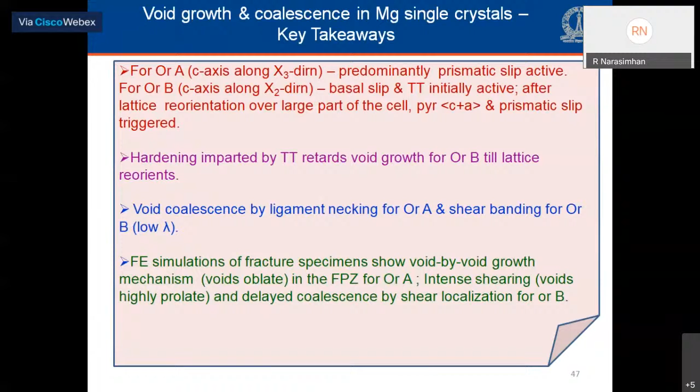Instead of going through this in greater detail, let me conclude this talk, since we have reached the 1 hour mark, by taking an overall perspective of what we can understand from our work, whatever we have done till now.

As far as the fracture mechanism is concerned, we have noted that triaxiality is important. High triaxiality, as would prevail near fatigue pre-crack tips under mode 1, would promote brittle failure, and moderate triaxiality, as seen in notched specimens in our experiments above 30 micron radius notches, would lead to a switch in the fracture mechanism to ductile void growth and coalescence. Also, under mixed mode loading, we see a hybrid mode with evidence of both ductile as well as twin-induced brittle failure having taken place.

As far as the role of twinning is concerned, our studies show both detrimental and benevolent effects. On the detrimental side, we have seen from our single crystal experiments that cracks propagate along twin boundaries, evidence of which was also seen from the fractographs showing brittle twin-induced fracture morphology, leading to low fracture resistance.

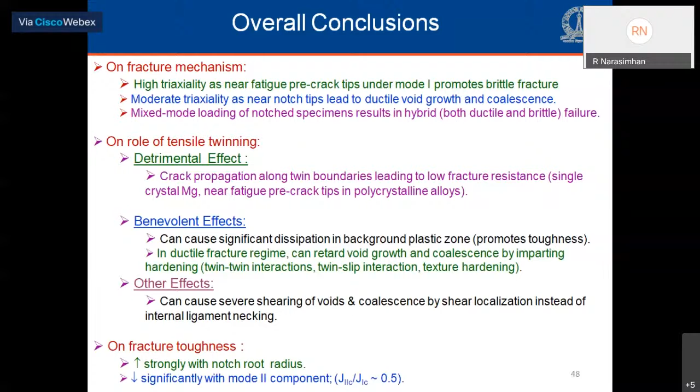In fact, this drop is more than what has been reported in aluminum alloys and steels, by more than a factor of 0.5. We were able to understand this by again examining the microstructure, which plays the most important role for magnesium alloys, showing that twinning is one of the most important factors affecting both the fracture mechanism and the possible dissipation in the background plastic zone.

So with that, let me stop my presentation.

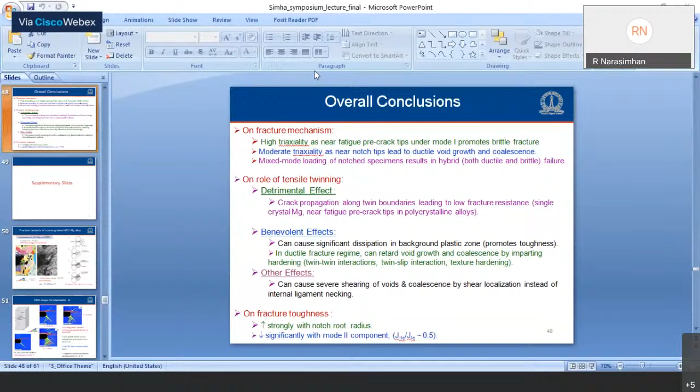Yeah, there is one question here: Is the evolution law for twinning similar to standard J2 plasticity? What is the driving force for twinning evolution? Again, a good question, this is from Siladitya. Now there is a lot of debate in the literature whether critical resolved shear stress is the driving force for twinning.

And now, after a lot of work, I think there is a consensus emerging towards CRSS playing an important role. So if you look at some of the eminent researchers in the field, like Barnett, and I think recently there is some work from this group, the Spanish group, can't place his name, from IMDEA.

There's a very recent paper in Acta where they measure the CRSS for tensile twinning in polycrystalline magnesium around 40 MPa. So now there is a consensus that Schmid's law still applies for twinning, and therefore the driving force for twinning is still based on the resolved shear stress.